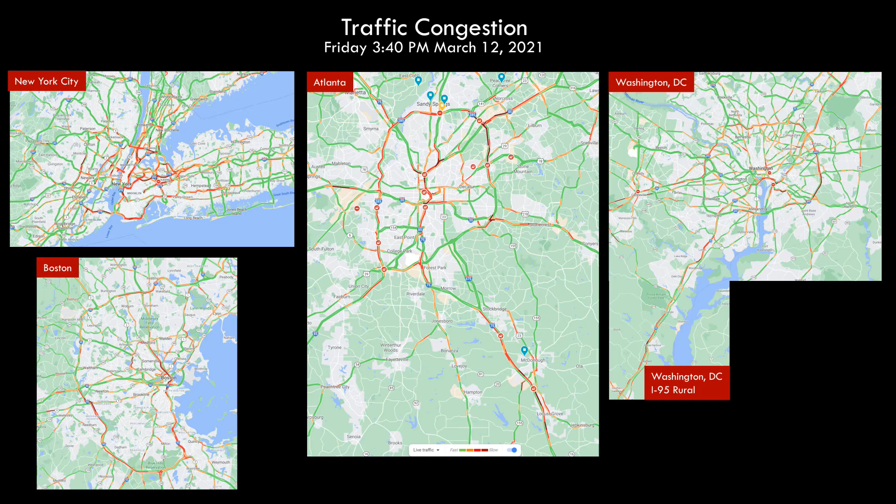If you live in the Atlanta metro area, traffic congestion is probably your #1 problem. Atlanta ranks 11th in the U.S., but it's bad everywhere. In fact, Chicago is the worst. Rush hour traffic has doubled in the past 20 years. This is a snapshot of 4 American cities, Friday afternoon at 3:40 p.m.

Highway congestion in America is no longer confined to metro areas. Rural areas used to be free of congestion a few years ago. Not anymore. This is the backbone of America's supply chain. Not working and costing the trucking industry $95 billion in 2021. Congestion is everywhere, even at airports. Our interstate highway system is the heart of the American economy, with many blocked arteries.

Only a new heart will fix this problem, like a new high-performance nationwide transportation system that's built for the 21st century. That's much cleaner, faster, safer, energy efficient, and affordable to everyone. It would be America's largest ever infrastructure project and would look something like this.

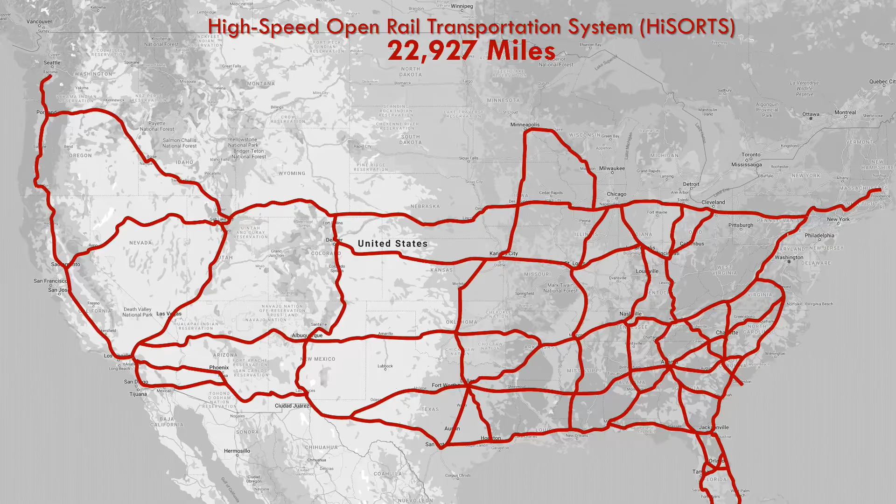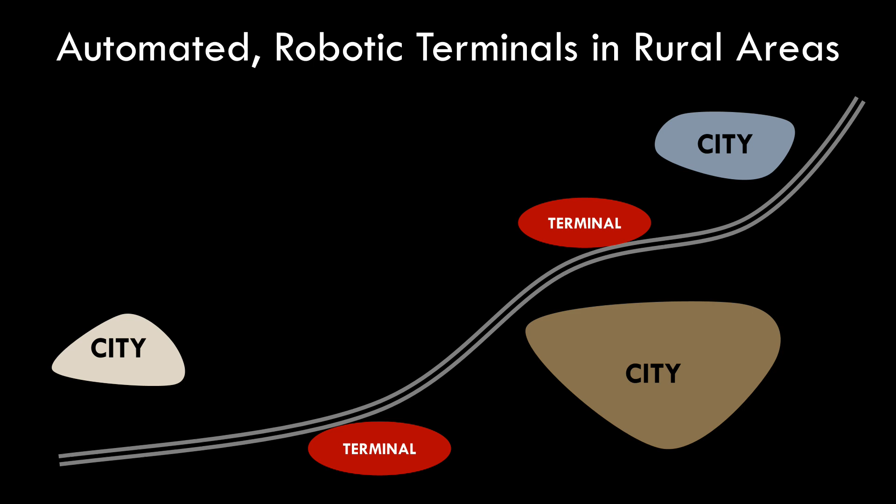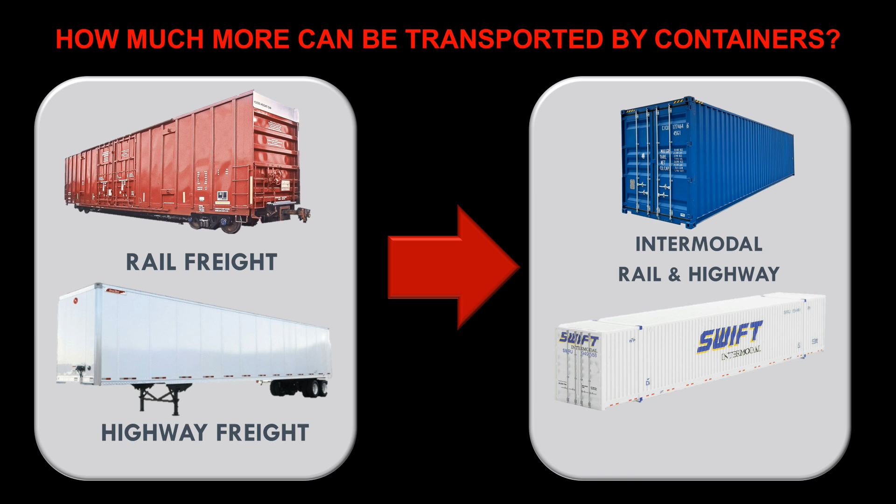A 23,000-mile network and open to use like our interstate highway system, to anyone or any transportation company using certified vehicles. An elevated railway will be constructed along existing right-of-ways that's always above the traffic congestion and include high-flow rate automated robotic terminals located in rural areas to load and unload high-speed autonomous single-rail vehicles that will be powered by hydrogen. There will be different kinds of aerodynamic rail vehicles designed for high speed and transporting intermodal containers, passengers or automobiles, and all moving at the same speed in platoons of 15 or more vehicles.

This will be a system that's affordable for everyone. At $1 per mile for containers, 10 cents per mile for passengers, and 20 cents per mile for transporting autos. This will be a private sector system, designed and engineered to pay for itself and generate a profit. For example, operating at 25% capacity, vehicle tolls at $1 per mile will generate $226 billion annually and create a short payback period for the railway construction bonds.

But first, we must build a prototype operational system in 3 states to validate our economic projections that include toll revenues and the key performance parameters of these new products. The most important parameter is the dwell time of the 43 automated terminals and the time and cost to load and unload intermodal containers and automobiles. The terminals will be located around major cities as well as in rural areas at 75 to 100-mile intervals and will be the place where all of the high-speed rail vehicles will be refueled, which will require an enormous amount of hydrogen and electrical power that America does not have.

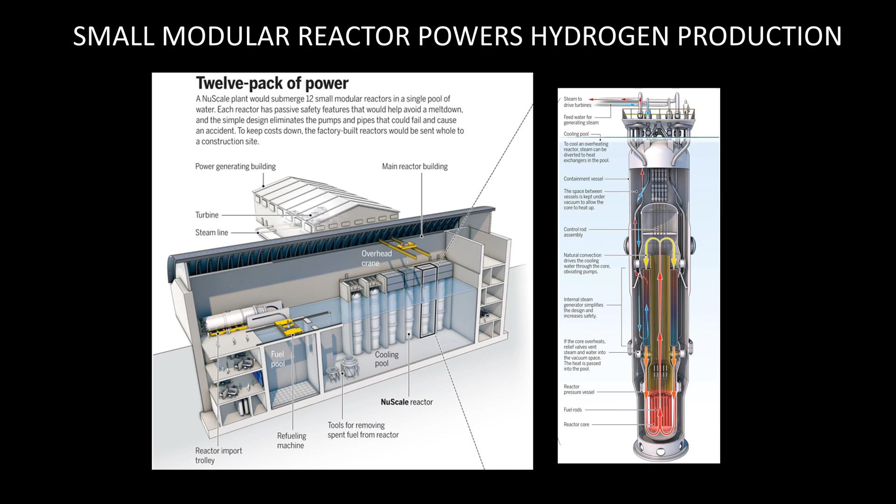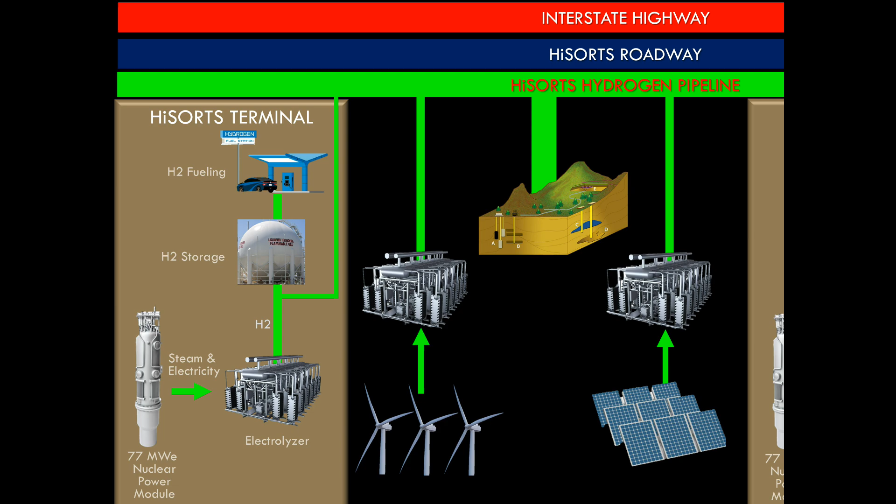What we do have is the technology, and it's called 4th-generation nuclear. This amount of energy can only be provided by using small modular reactors located at or near every terminal to provide steam and electricity for the electrolyzer that produces low-cost, clean hydrogen for rail vehicles and the local community.

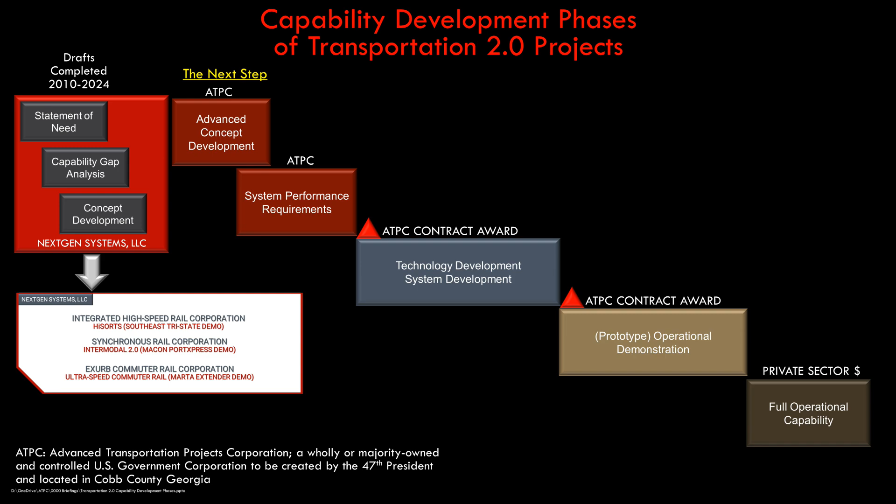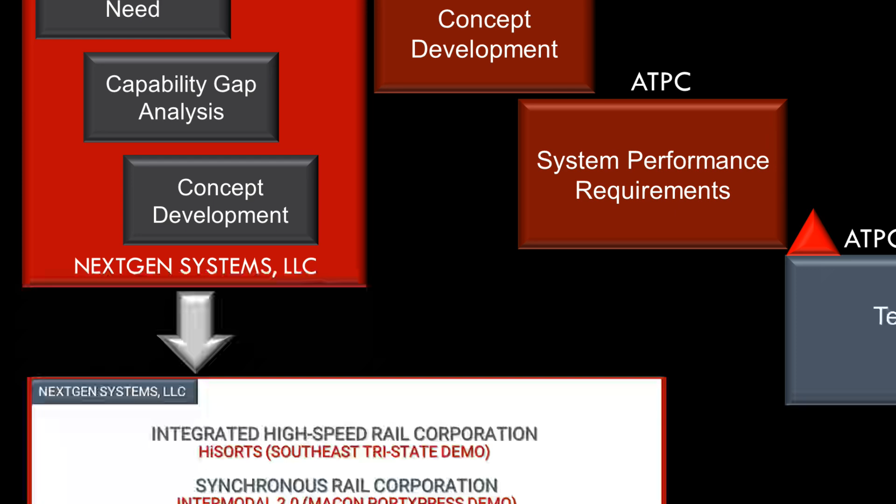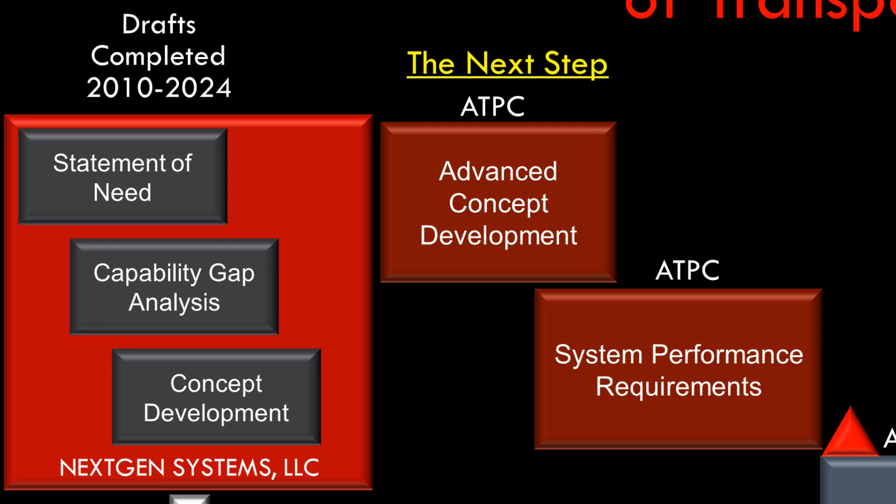So where do we start, and how do we make this happen? First, the HiSORTS project is one of 3 joint venture projects proposed by NextGen Systems and Mel Hawker. Each project has a draft concept of operation and is ready for the next step, which is the advanced concept development phase. This phase will include a more formal, systematic, and in-depth operational and functional analysis of the problem and the proposed solution. It will also include identifying and assessing capability gaps, creating economic models, conducting market analysis, and developing a more detailed concept of operation.

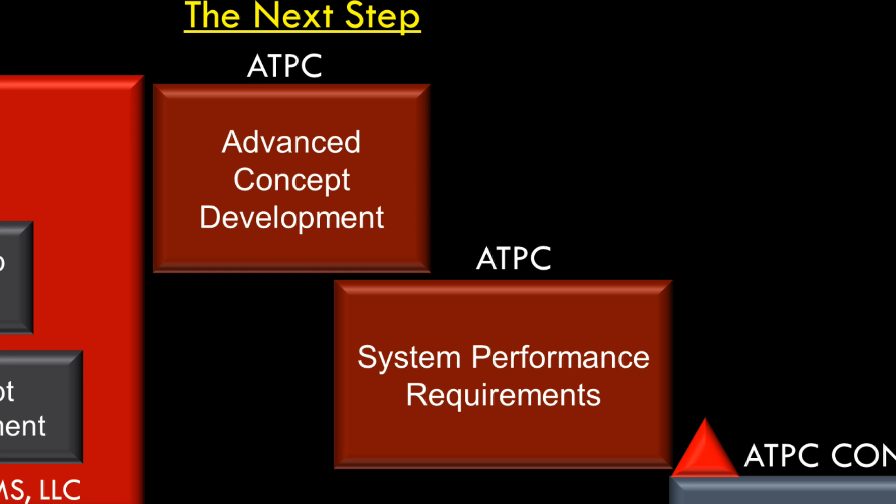The second phase involves the origination of the draft versions of the system performance specifications, design standards, system engineering plan, integrated master plan, and other project documents required for award of a system development contract. It may also include development, test, and demonstration of critical items or key performance or design parameters. These two phases will be funded and executed by the Advanced Transportation Projects Corporation, ATPC, using internal staff that is heavily supported by contract services, provided by a wide range of small and large professional services firms, universities, and others.

The next phase is technology and system development, which involves the award of one or more contracts for the development of the required technologies and system elements, as well as for system design, integration, and test. The development contract will include the design and construction of an elevated high-speed railway and 2 terminals that will be used to demonstrate full compliance with the performance and design specifications of the vehicles, functional elements of the terminals, elevated railway, and the traffic control system. It will also include design and construction of a 4th-generation nuclear power and hydrogen production and distribution system.

A contract for an operational demonstration of the integrated system will be awarded when the performance requirements of each of the major functional elements and integrated system have been successfully demonstrated. The operational demonstration will require the construction of approximately 3,000 miles of elevated rail lines, 43 terminals, and procurement of 23,000 rail vehicles required for operation at 25% capacity. It will also include design and development of maintenance facilities, vehicle garages, and other support systems required for demonstration and sustainment of the high-speed, open rail transportation system in Georgia, Florida, and South Carolina.

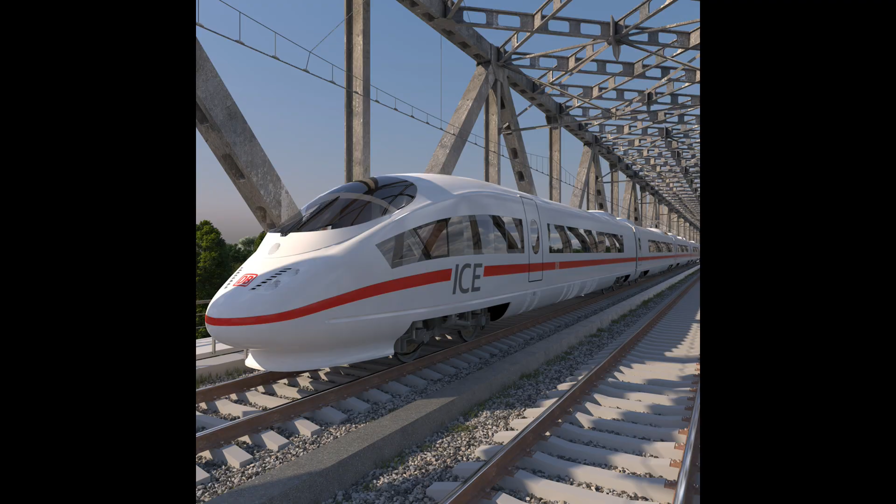So, what's in it for America? It's a simple answer. America will rapidly move from being a laggard to a leader in high-speed rail transportation and own the technology that makes it all possible. Today's intermodal freight and passenger rail systems will become obsolete by a new, open, innovative rail system that's faster, cheaper, and profitable, and that requires no government capital or operating subsidies. However, what it will require is a government and private sector partnership to fund the development of the technologies and all of the Legos needed to make this happen.

After the HiSORTS system and the maintenance and support systems have successfully met all operational and economic requirements, it will be replicated and used to expand the HiSORTS network throughout America by private sector corporations. The Advanced Transportation Projects Corporation will license the technology it owns and receive royalty payments, which could be used as a payment on America's debt or for additional transportation technology investments. Either way, it's icing on the cake.